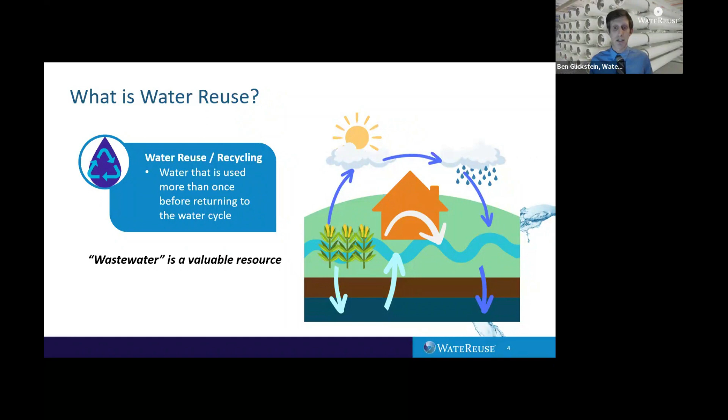So why reuse water, right? Well, the main reason is when there's too little water, as we've seen a lot in California, when there's drought and water scarcity. This is another source of water that's already right there in your community, easy to use, easy to access. Interestingly, surprisingly, sometimes water reuse is now being used in situations where there's too much water. In some East Coast communities, water recycling at a district scale is being used to deal with sudden intense rainwater, stormwater, flooding, things like that. If you can treat and reuse the water locally, you actually have a better resilience during situations like that. And water quality too—these water recycling technologies are really good at cleaning up all different types of water so it can be used in communities.

So before I hand it over to my colleagues, I thought I would do a little level setting on some terminology, at least the way I use it.

The first kind of recycled water, which you'll hear about from Florence, Melody and Reena, is non-potable reuse, or recycled water that we're not treating for drinking. We have the technology to treat this water so it's completely safe for human contact. We take water from our various wastewater streams and treat it to a level where it's great for things like irrigation, cleaning, building cooling, and toilet flushing.

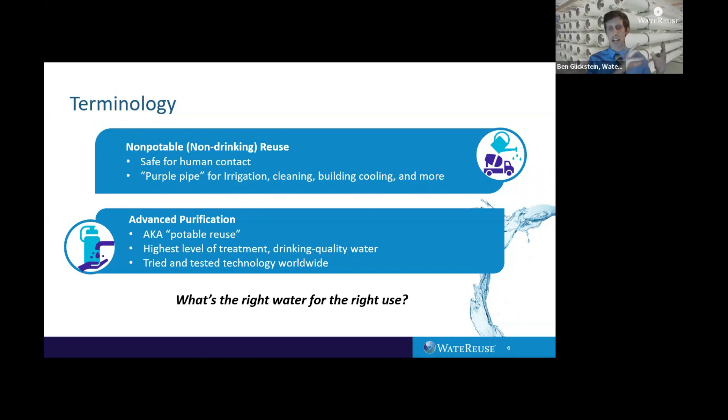The only downside to the advanced purification technology is it can take a ton of energy and can be expensive to implement. So when we're thinking about the rates people are paying or our greenhouse gas impact, you might say, if all we really want to do is irrigate or cool a building, there'd be no reason to use some of those higher level technologies. We can create safe water for one purpose or another.

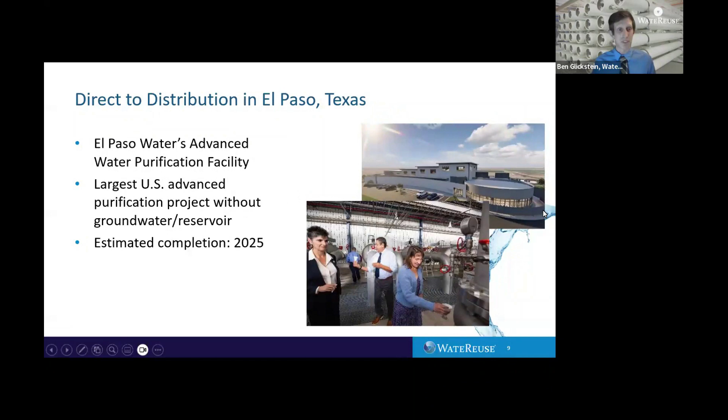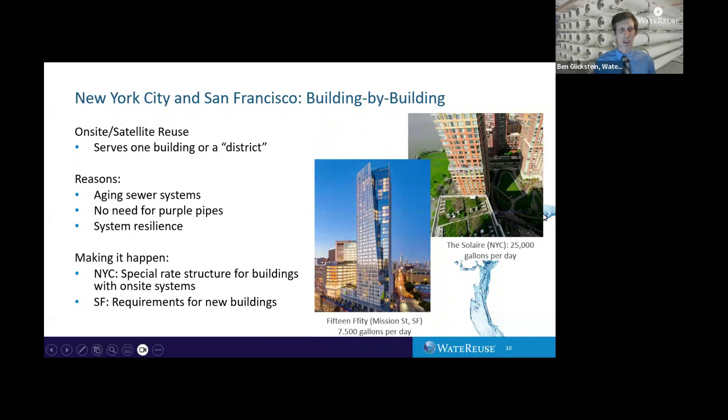There's lots of different uses for the water, as I highlighted before. In terms of some other great non-drinking uses, I wanted to highlight New York and San Francisco. San Francisco is a great example because it's right across the bay, and they've taken their own approach, focusing more building by building. Because they have these big developments, money going into major new downtown developments, they have ways of mandating or incentivizing these buildings to create smaller satellite treatment systems right there in the building or set of buildings to treat water. You'll be hearing a little bit about some different kinds of satellite plants in East Bay MUD's area, but that's just another cool way that we can recycle water. Those are being used for cooling, toilet flushing, things like that.

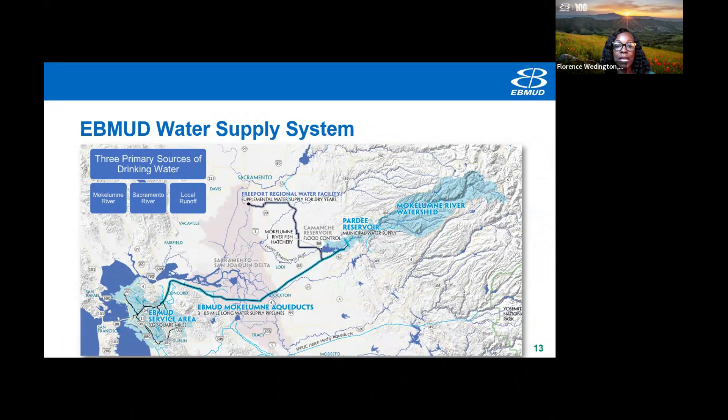First of all, we need to maintain our current conservation levels and expand them. Our goal is to conserve 70 million gallons per day by the year 2050. In addition to that, we want to maintain our current water entitlements, our water rights. And then we're also going to continue to develop regional partnerships and water transfer agreements. We recently joined the formation of the Los Vaqueros Expansion Joint Powers Authority, and that's another way that we are able to think forward and partner with other agencies in the Bay Area to provide reliability.

And then we also want to continue sustainable groundwater management and stewardship, such as through the development of the East Bay Plain Groundwater Sustainability Plan, as well as one of our San Joaquin County projects, which is the Demonstration Recharge Extraction and Aquifer Management Project, also known as our DREAM project.

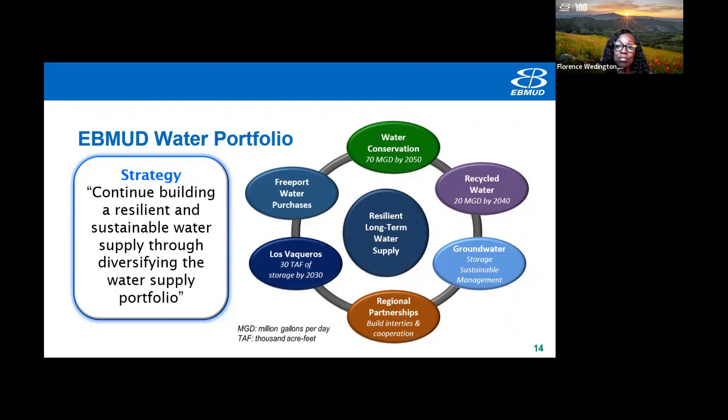And then finally, part of our portfolio includes recycled water, so we can further expand our recycled water program with our existing projects as well as developing new projects. I'm going to turn it over to Reena Thomas, an associate civil engineer in our Office of Water Recycling, who will tell you more specifics about East Bay MUD's recycled water program.

Thanks, Florence. Over the next few slides, I'm going to present an overview of the district's existing recycled water program, and highlight some of the challenges and opportunities we've had in operating and expanding our system.

Currently, we have 5 non-potable recycled water projects in place as part of our water portfolio. These include the East Bayshore Recycled Water Project, San Leandro, the San Ramon Valley Recycled Water Program, the North Richmond Water Reclamation that provides cooling tower water supplies for Chevron, and the Richmond Advanced Recycled Water Expansion, or RARE project, that provides boiler feed water for Chevron.

We have a current capacity to treat up to 9 million gallons per day of recycled water, and that saves enough drinking water to supply the indoor needs of approximately 180,000 people within our service area. The district has set a goal to expand our recycled water system to provide 20 million gallons of recycled water by the year 2040. So we're almost halfway to that goal.

More than 80% of our current recycled water serves the Chevron refinery. That's because by targeting our recycled water infrastructure to customers such as large industrial users like Chevron and large landscape irrigators like parks, schoolyards, and golf courses, we're able to impact the communities at large.

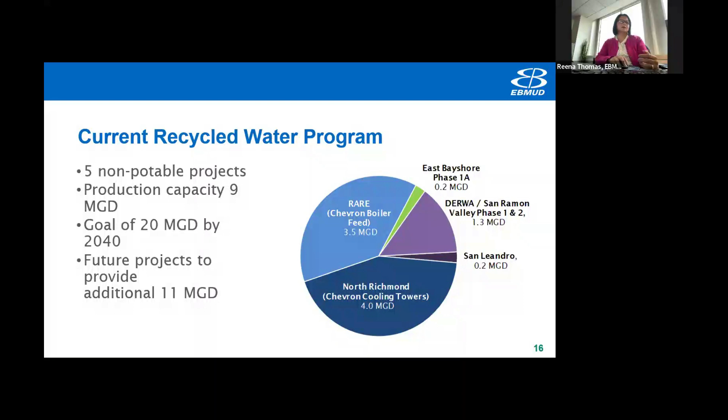One notable thing to recognize is that while the district's water service area is really large, about 332 square miles across Contra Costa and Alameda counties, our wastewater service area really includes about 88 square miles right along the bay's east shore.

Our East Bayshore Recycled Water Project, located in Oakland, is the district's single East Bay MUD only recycled water project. For the other recycled water projects that are outside of East Bay MUD's wastewater treatment service area, the district has to partner with other sanitation agencies.

We partner with the City of San Leandro to serve customers near the Oakland Airport. We partner with West County Wastewater District to supply Chevron. And we partner with Dublin San Ramon Services District for the San Ramon Valley Recycled Water Program.

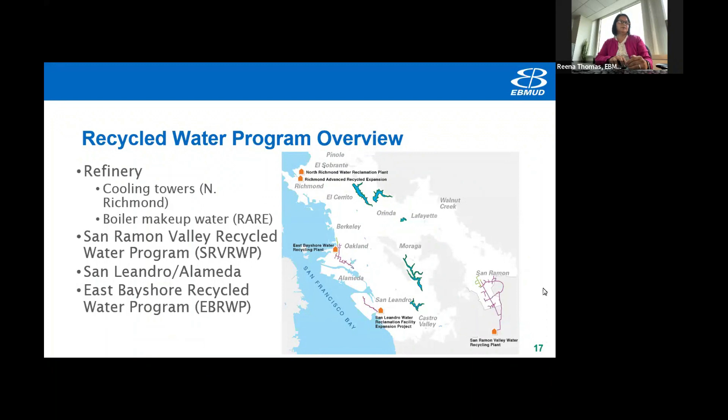The East Bayshore Recycled Water Project currently serves portions of Emeryville and Oakland, and we plan to expand that to serve portions of Berkeley, Albany, and Alameda in the future. After the initial operations of this system, serving irrigation and interior uses like cooling towers and toilet flushing, we found that the quality of the recycled water, while it meets all regulatory requirements, is higher in salts and ammonia and not as compatible with the existing building plumbing for interior uses.

Additionally, expansion is kind of difficult in this area because customer demands for landscape irrigation in these cooler areas right by the bay are low. There's just not a lot of irrigation demand there. And the construction costs are also higher in this area because it's already constrained with traffic and existing utilities.

So the district has been performing some pilot testing at the treatment plant to determine suitable treatment alternatives so that we can try to improve the water quality to lower that salt and ammonia content in the recycled water, to make it more compatible with interior plumbing so we can increase our customer base.

On the other side of the hills, the San Ramon Valley Recycled Water Project that serves customers in the city of San Ramon has had a lot of recycled demand, so much so that we actually don't have enough recycled water supply to keep up with those anticipated demands.

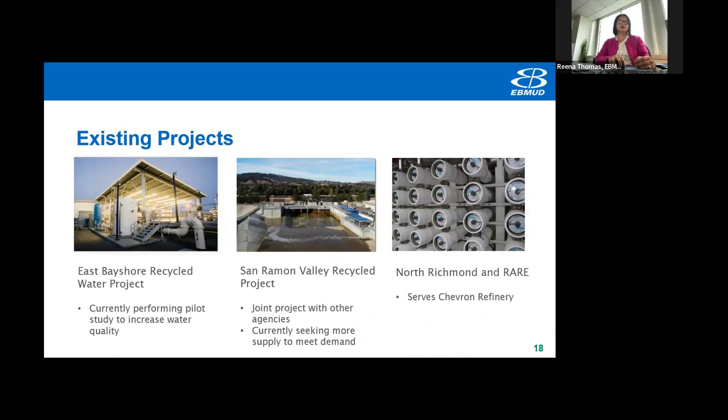We also have a recycled water fill station located outside of our wastewater treatment plant in Oakland that provides free recycled water for commercial customers. The commercial customers have to complete a training and a permit application before they can access the fill station.

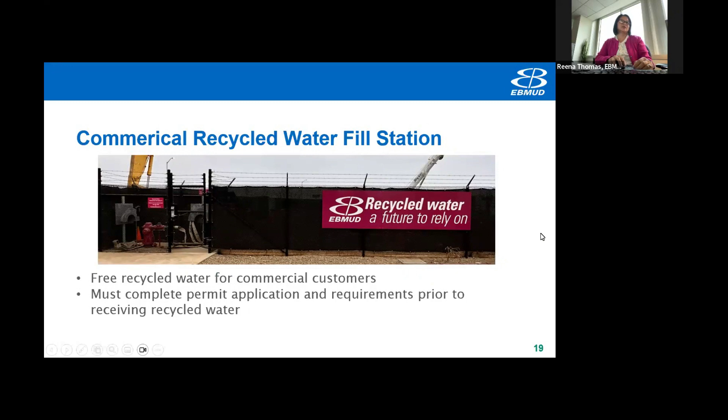Our future planned projects include providing recycled water to the Phillips 66 refinery in Rodeo. The refinery is currently changing from a crude oil refinery to producing renewable diesel, and in line with that renewable aspect of the project, they anticipate switching to recycled water by 2030.

In addition, because many of the large irrigators like golf courses are far away from each other and far from our existing centralized recycled water treatment and distribution pipelines, we're also exploring the concept of package treatment plants at those user sites, or on-site satellite recycled water treatment facilities that would be funded by the customer to produce irrigation water for their golf courses, reducing their reliance on potable water.

We've also partnered with the Central Contra Costa Sanitary District to evaluate the feasibility of other recycled water projects between our agencies. We have Melody LaBella here from Central San with us this evening, who will go into further detail on this partnership in a few minutes.

Our recycled water strategic plan update is scheduled to be completed in 2024. It's going to take a look and an evaluation of what our current recycled water program is, our goals, and then take a look at potable reuse as we examine how advanced treatment programs in the state are progressing, how the current regulatory landscape lies, and how our other district water supply levels are doing.

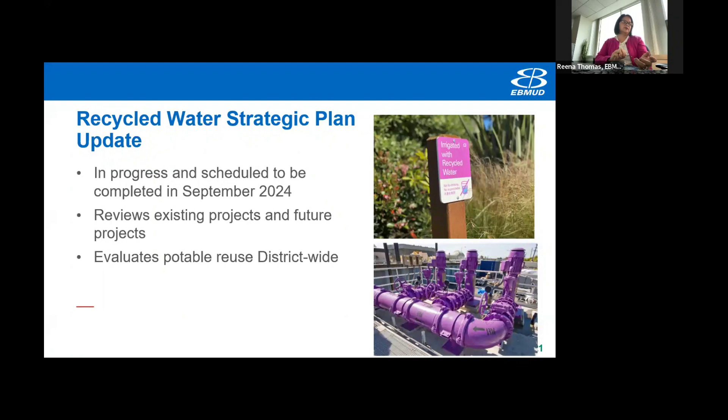As Ben mentioned previously, potable reuse or advanced treatment projects are in place or in progress throughout California and the world. Our strategic plan report will also evaluate alternatives and the feasibility for this resource for the district. So that concludes my presentation for this evening.

I'm going to hand things over to Melody LaBella, the Resource Recovery Manager at Central Contra Costa Sanitary District. She'll speak about recycled water in their service area. Thanks, Reena, so happy to be here this evening.

So about Central San, we're a special district with a mission to collect and treat wastewater from a 146 square mile area that you can see here to the left. We actually overlap with East Bay MUD, so more than half of our wastewater customers are East Bay MUD drinking water customers. So when we say our customers, we have a lot in common, and I like to think about that as we look at doing our job and protecting our water resources.

Central San has over 1,500 miles of sewer collection pipelines that bring all that wastewater to our main wastewater treatment plant in Martinez, rated to treat 53.8 million gallons every day. We serve about 500,000 residents and more than 3,000 businesses. In the dry weather months in 2022, we received an average of 34 million gallons every day. So what that means is all year round, we get at least 34 million gallons of water that could be leveraged and used for something more than just discharging it safely back into the San Francisco Bay system.

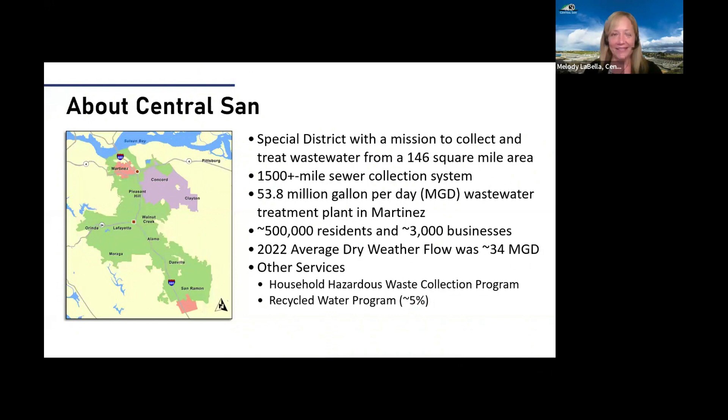So I want to tell you a little bit about Central San's program. Back in the mid-90s, we executed an agreement with Contra Costa Water District, another water district that we overlap with and share customers with. They're very close to where our treatment plant is, so they were a natural first partner with us. We signed this agreement with them that allowed us to distribute recycled water in this particular area, as shown on this map.

Over the last couple of decades, we have invested in and built a network of 15 miles of purple pipeline to distribute recycled water, predominantly for landscape irrigation uses. We're only treating it to the standard required for landscape irrigation, not treating it as far as drinking water, so we're not wasting energy.

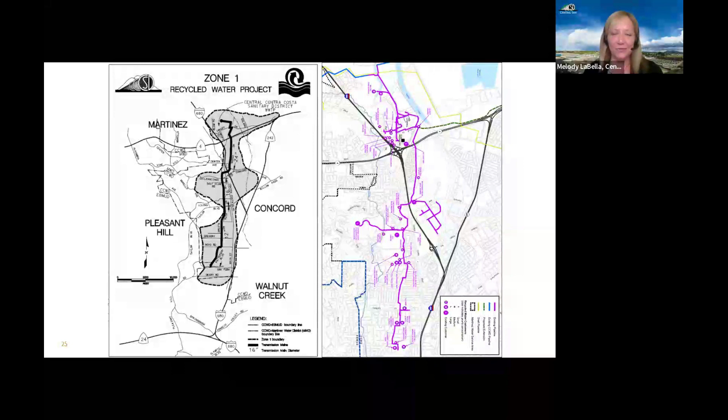We've done everything we can within that area. We've served golf courses. We have 1.5 that we serve of those.

We serve a junior college, Diablo Valley College in Pleasant Hill. We serve several schools in the Mount Diablo Unified School District. Again, this is ball fields, landscape irrigation.

We also serve parks. And then our most recent significant expansion was into the Concord area. If any of you have ever visited the Willows or the Veranda, a big shopping center there now, that's where we brought recycled water out into that area.

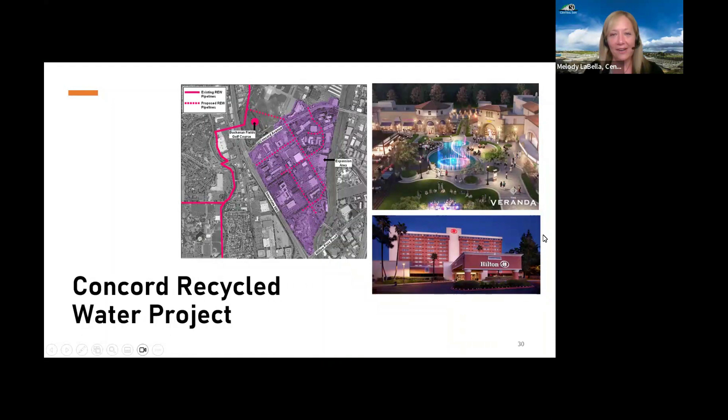Our latest customer is the Pleasant Hill Library, again using it outside for landscape irrigation. Some of our customers, like Diablo Valley College, have brought it inside the building for toilet and urinal flushing. What a perfect use for recycled water, not wasting drinking water for that.

Central San followed suit, and when we did our seismic upgrade of our headquarters building, while we had the building all torn up, we brought in purple pipelines inside to also add toilet and urinal flushing in our headquarters building.

Like East Bay Mud, we've also started a commercial truck fill program. We offer the first 100,000 gallons of recycled water free of charge to incentivize this use. We have a couple of different ways that we distribute it.

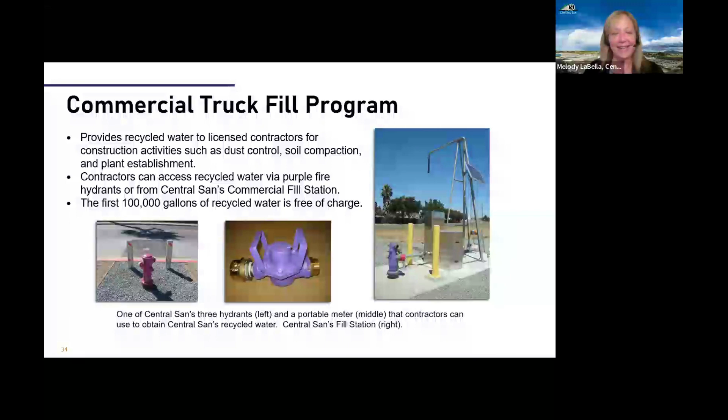We have an overhead fill station right near our treatment plant. And then we have a few purple hydrants, and we issue these purple meters you see here to encourage contractors to use it for construction activities such as dust control, soil compaction, and plant establishment. Again, all things that let's save our drinking water for better purposes.

We also started, in the 2015 drought, a residential fill station program, which we're able to do because we have our household hazardous waste collection facility, and it already had staff there serving customers. So this was an easy addition for us that we can then keep going.

A lot of agencies started these programs during a really bad drought but weren't able to continue them. We're sort of unique at Central San, and we're able to continue offering this service to our customers.

After completing an application and a short training class, customers of Central San can take up to 300 gallons of recycled water and use it to hand water their lawns, landscaping, or their gardens.

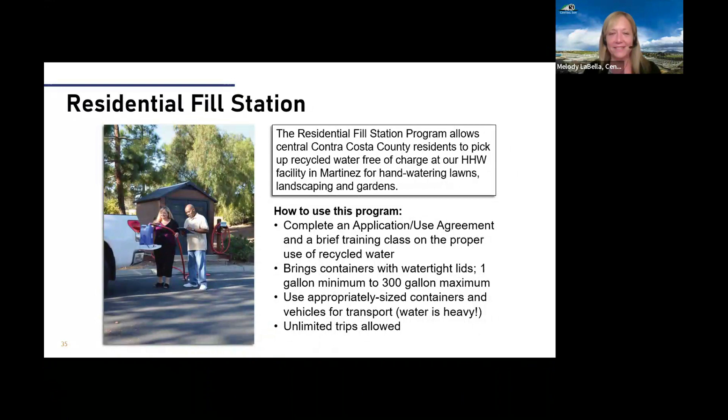We've done all we can within our area that we're approved to distribute recycled water. Water and wastewater agencies have to work together to develop projects like this, and so we've done what we can within that area.

Now we are looking further. How can we stretch our water resources and bring that value back to our community? This is one of the partnerships that Rena mentioned that Central San has been involved in.

This is the temporary wastewater diversion project, in which Central San diverts some of our wastewater on a temporary basis to Dublin San Ramon Services District, who has a partnership with East Bay Mud, and they provide this recycled water out in the valley area. This is to East Bay Mud customers in San Ramon, the San Ramon Valley Recycled Water Program. So we've had an existing interconnection between our two systems.

We just had to change it. The existing connection was for emergency situations. We needed to modify it so that when we decided to divert this wastewater, we would be able to control that and make it happen.

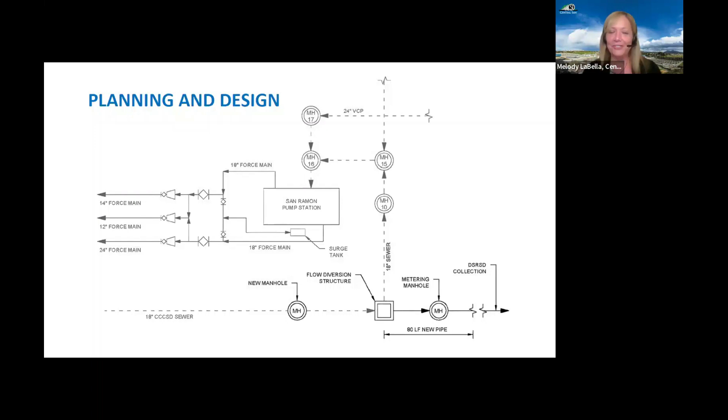This can potentially stretch some more of the water resources, allowing for the production of additional recycled water that could then come back into East Bay Mud's service area, which is also Central San's service area. Again, this would be for landscape irrigation.

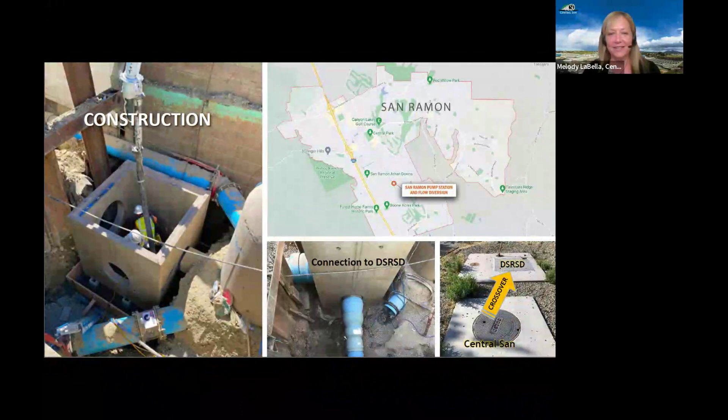In terms of looking to the future, in terms of our recycled water planning efforts at Central San.

Among them, and this is one we're very excited about, is this memorandum of understanding we have with East Bay Mud to evaluate the feasibility of a range of potential recycled water project concepts, from expanded raw wastewater diversions all the way up to and including the potential for potable reuse, or introducing recycled water into the drinking supply.

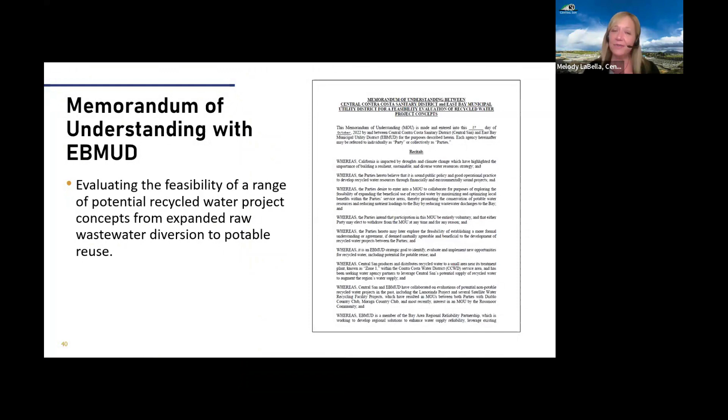Back in 2016, Central San did a study on wholesale opportunities for recycled water. Where could we partner? Who could we partner with? What kind of projects could we do that really would take advantage of the potential supply of water that we have? As I mentioned, 34 million gallons every day in 2022 we had right within our treatment plant.

And so this was one of the most interesting findings of this study, that Central San's treatment plant is upstream of all of East Bay Mud's water treatment plants and water reservoirs. So might it work that Central San could produce highly treated recycled water, inject it into the Mokelumne Aqueduct system, and distribute it into East Bay Mud's system for further treatment and distribution to its customers?

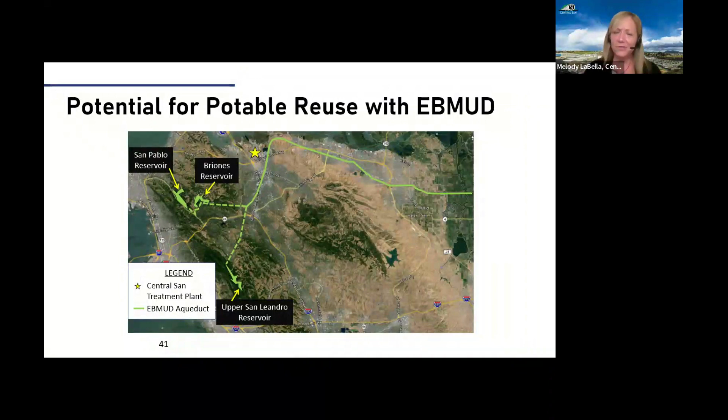Some people get a little leery when they hear about this concept of turning wastewater into drinking water. But I just want to assure you all that our NASA program, from day one that we've been sending shuttles up into the atmosphere, they have always been using this technology. They don't bring extra water with them, they reuse everything as part of their shuttle missions. This technology has existed for many, many decades. The trick has been to bring it up to full scale and make sure we do it in a way that keeps it safe for the public.

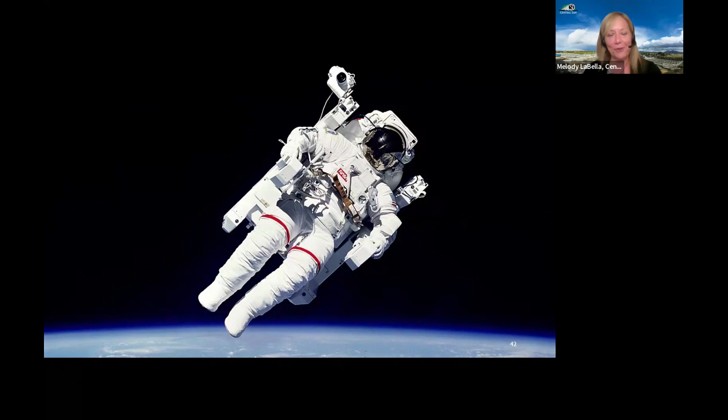So I'd like to leave my presentation with something for people to take action on in a reachable way, because not everybody can get recycled water. We don't bring it to individual residents because it's very cost prohibitive to do that. But I like to tell people some ideas for what you can do every day to support recycled water.

Start looking at your toilet and your indoor drain as a recycling bin, because for many agencies and many communities, this becomes the source water that's going to get used again. So what can you do? Only flush the 3 Ps: pee, poop, and toilet paper. That's what our systems were designed to treat.

Don't flush items such as toxic products like paints and herbicides. Those are things you can take to a household hazardous waste collection facility. Medications, don't flush those. Wipes, even if they say flushable, can cause clogs, backups, and overflows, and then we lose that water supply that otherwise we might be able to recycle. Tampons and tampon applicators aren't dispersible within the time frames of wastewater treatment, and the same goes for condoms. Lastly, avoid flea and tick spot-on products. This was a big eye opener for me and many others, so I really like to share this as my final thought.